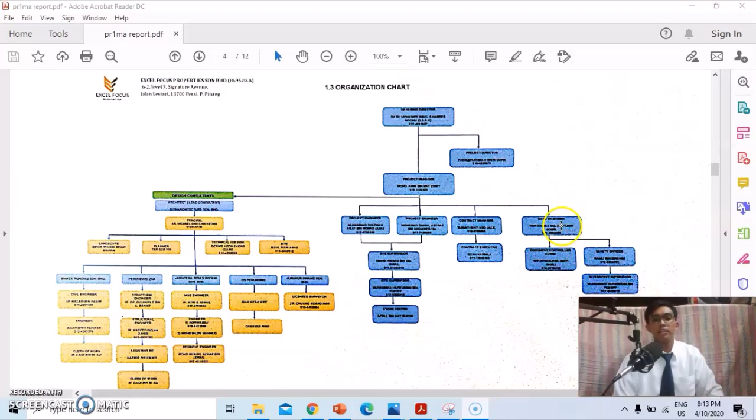This is the organization chart. I was placed under project engineer Muhammad Daniel Ashraf for the first 3 weeks, the following 2 weeks under Muhammad Shazwan Aizat, and the remaining weeks under Nur Anis Suliana, who is the QA and QC engineer. Sorry for the blur on the chart.

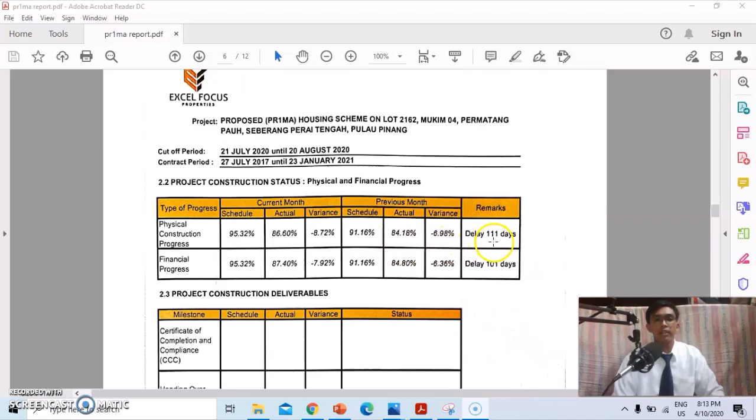The project's physical construction progress is delayed by 111 days due to COVID-19, and the financial progress is delayed by 101 days due to the same factor. Now we move on to my job scope during my internship period at Anas Construction Sendirian Berhad.

Mostly what I did was quality control and quality assurance, a little bit of field work, and process control. For quality control and quality assurance, there are quality standards that we need to check to see whether they meet the standard or not. The quality standards are available in CIS 7:2014 by CIDB.

There are Annex A, quality standards for structural works; Annex B, quality standards for internal works; Annex C, quality standards for M&E works; and Annex D, quality standards for external works. During my internship, I only did quality checking for internal works.

Based on the CIS 7 requirement, these QLASSIC assessment tools are the tools used to measure the standard.

Firstly, the tapping rod, which I use to check the hollowness in tile. Second, the L square, which I use to check the alignment of the door frame or the structure. Third, the steel wedge, which I use to check the gap between the door and the door frame.

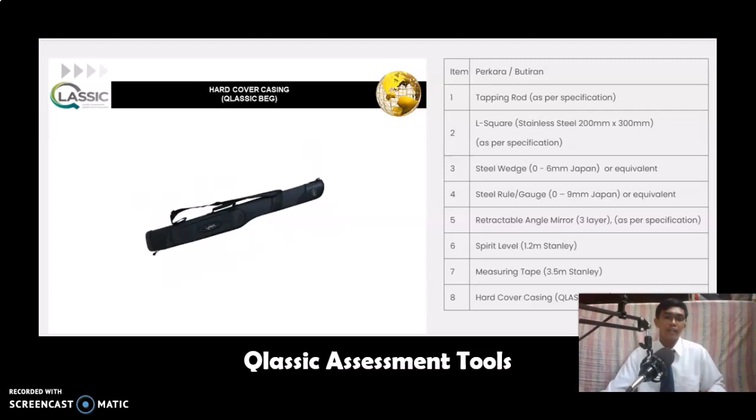Then the measuring tape, which I use to check the door size or anything else. That's all for the QLASSIC assessment tools.

This is about tiling. This is the tapping rod that I use to check the hollowness. Then I mark it, and later the labor will open the tile and redo it again.

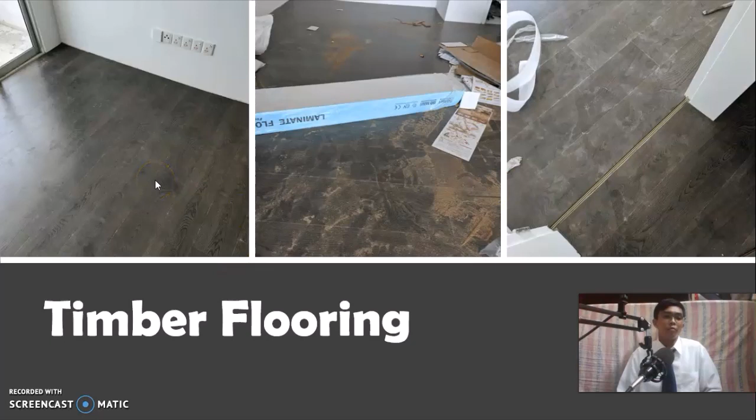For the timber flooring, we need to check visually whether there is warping, a floor jointing problem, or a skirting problem. Then we need to make sure the gap to put the T-mold is enough, not more and not less.

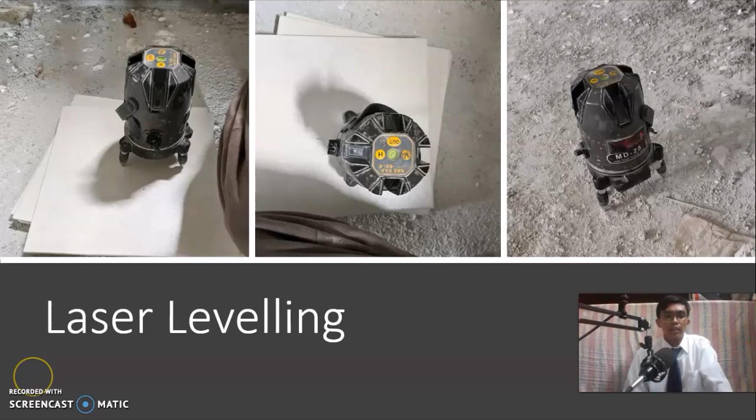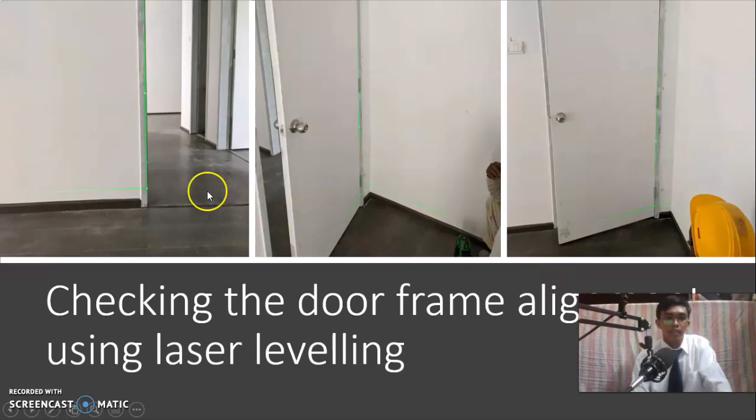This laser leveling is very useful in checking the vertical or horizontal alignment of any element. For instance, I used the laser to check the alignment of the door frame since the door could not be closed, and I found out that the door frame was a little bit curved at the middle. That's the reason why the door had a problem closing.

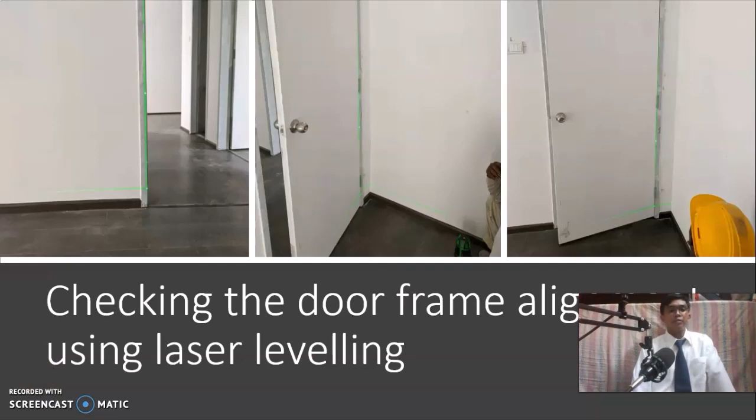I think that's all for the QA and QC part. Now we'll move on to fieldwork and process control.

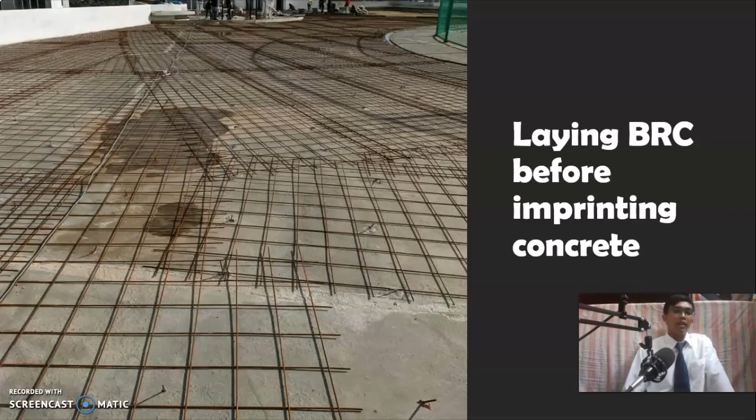Next, I also monitor the laying of BRC before imprinting concrete. It is important to see this because it is new to me; I never learned it in class. What I learned in class was using steel bar, but in the industry they use BRC. It is something new for me.

This is the progress. The concrete is still not dry yet, because when it is 50% dry, they will use this mold to shape the concrete. Then the result will be like this.

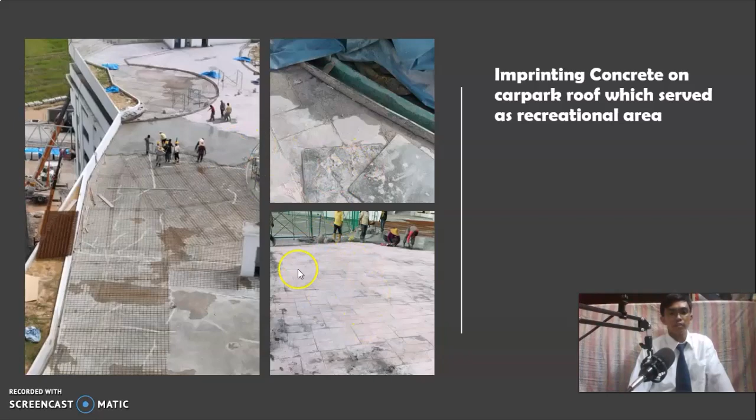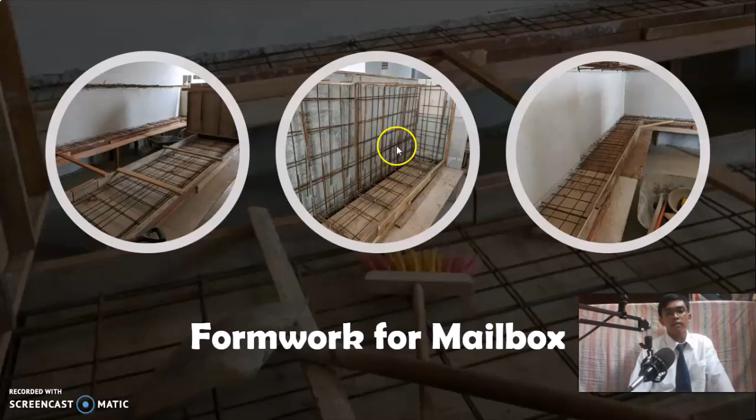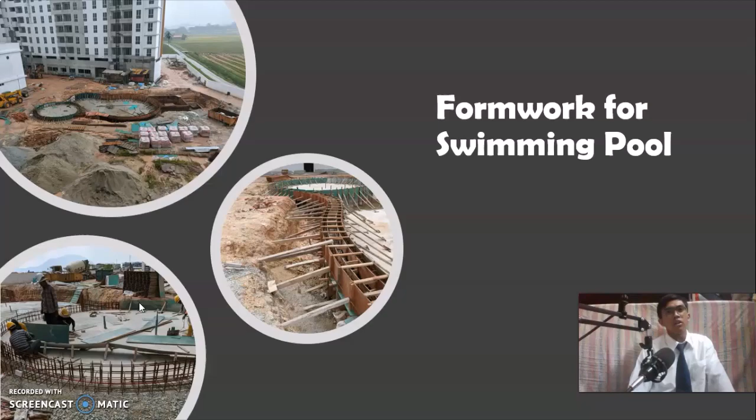This is the formwork for the swimming pool. I also monitor the way they construct the formwork. I think it took almost one week, if I'm not mistaken.

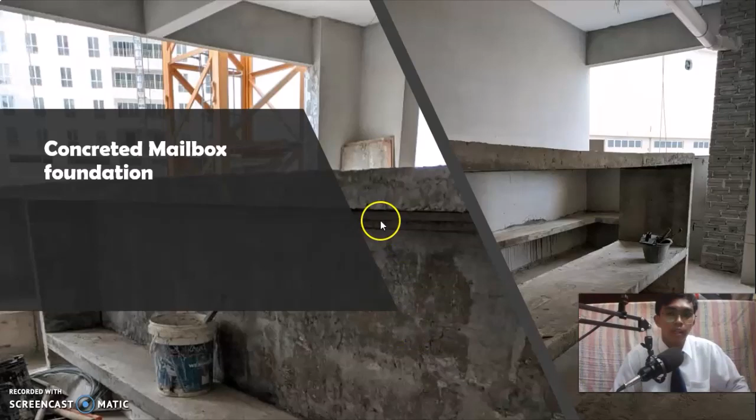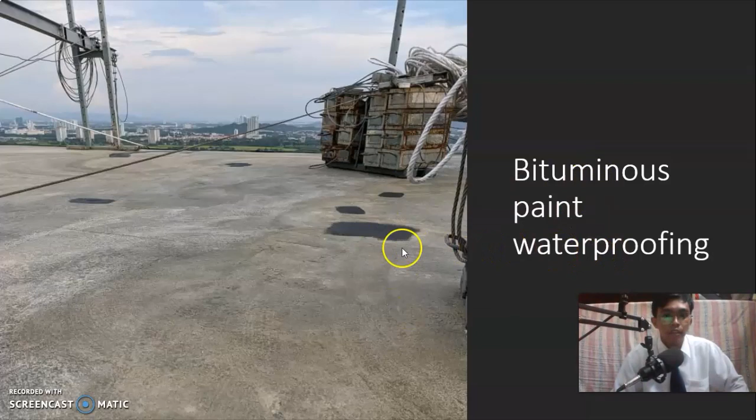Without wasting any more time, I would like to end my presentation with the waterproofing techniques used at my construction site. Firstly, this bituminous paint waterproofing is used at the rooftop.

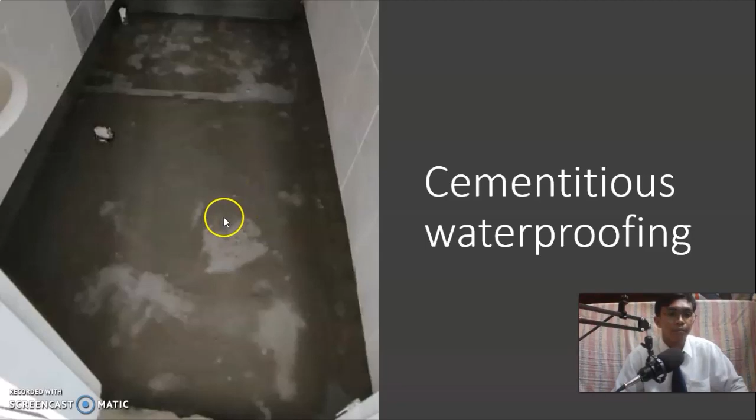Then the cementitious waterproofing that is used in the bathroom. Last but not least, the polyurethane PU injection that is used to treat the watermark at the car park roof.